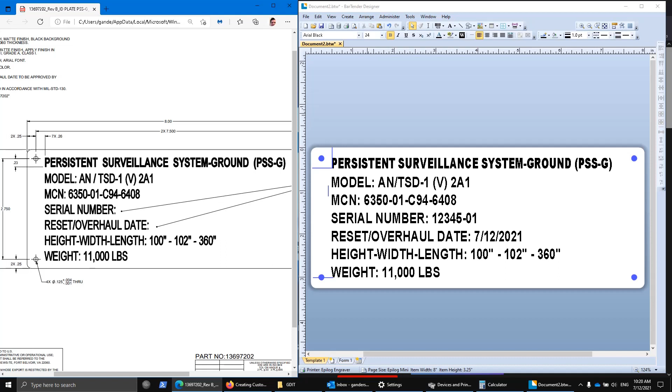In this video, we're going to go through the design process of a laser etched nameplate. This is a black anodized nameplate that is on the left here in this drawing, 8 inches wide by 3¼ tall, and it's just text, maybe with some fields. We'll pause throughout this video to change topics slightly, but try to keep it all within one close, tight video. We're going to be using Bartender because we're sending it down to a laser, and you could use Word, or any other product that has access to the Epilog print driver, but in this case we're going to use Bartender, and there are some layout considerations here I wanted to show.

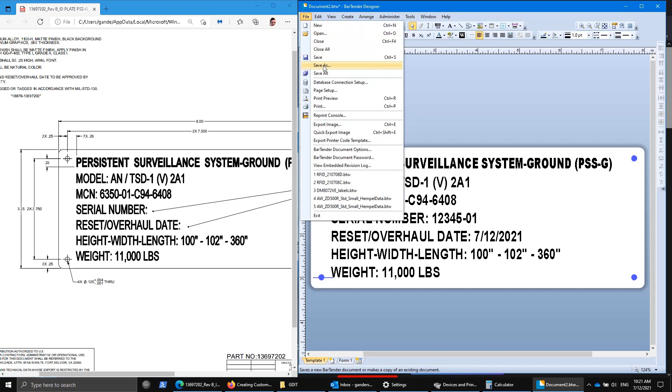I'm going to go ahead and start by just saving this somewhere on my desktop just to make sure I have a starting point here, and we'll start from scratch.

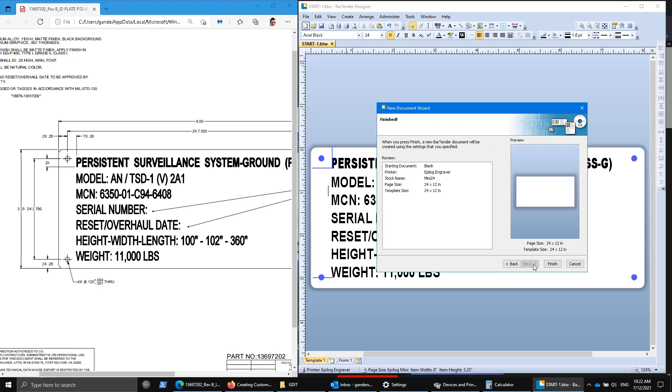So we go into Bartender, and we say New, say Blank, Next. We'll pick our printer, which in this case is an Epilog engraver, hit Next. And if I had a predefined size, I might pick that. There we go, got a predefined size, and I'll show in a separate video how to do that. Otherwise, you can create these things and then save them for future reference.

This is 24 inches wide by 12 inches deep, or however you want to look at it, and this is the flatbed size of the Epilog laser. In this, we are not going to be creating one 24 by 12-inch plate, but rather we could have multiple.

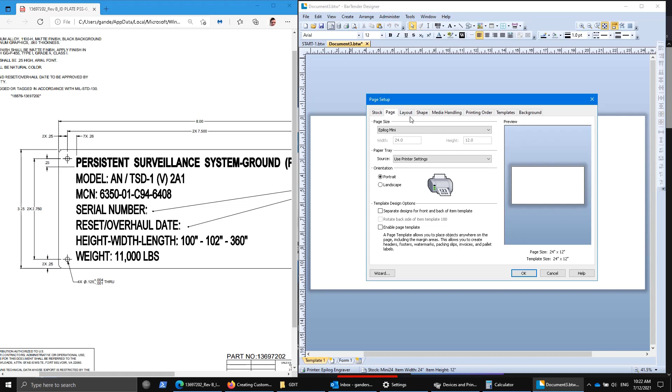So if we go into page setup, remember, for portrait, use portrait all the time for the Epilog Mini. The driver prefers that. And if I wanted to go in here and do multiple plates, I can fit as many as 3 across and 3 up and down within that 12 by 24 flatbed size.

Not going to use any margins. I am going to manually set this, however, to whatever that size was. It's 3¼ over here on the left-hand side, so 3¼ there. And I'm not going to use a gap. I'm going to just make the assumption that I'm going to slam these blanks right next to each other, and that the tolerances are good enough that things will still be centered, right?

And if this was a decal rather than a black anodized plate, you'd hit print borders. I sometimes change this to red, and this will allow the laser's driver to shift into vector cutting mode after it's etched the text. This is again for decals only, where you want to go in and do a vector cut on the outside to cut out the decal. This is a black anodized nameplate, so we're just going to leave that off.

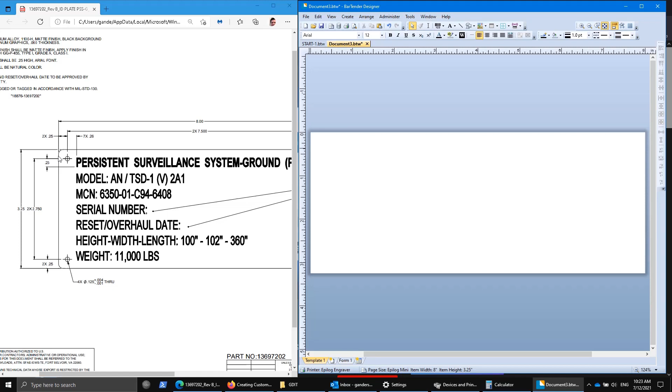Okay, this is pretty much done at this point. Now you can see it's 8 inches across, 3¼ inches tall, and gosh, this has got rounded corners here. Well, let's see. Could I have changed that? Yep, you can. You can say rounded rectangle, and you can even give it a corner radius. And if I look at this guy, it's 1/3, right? So you can do something like that, and now your Bartender screen will look like your blank.

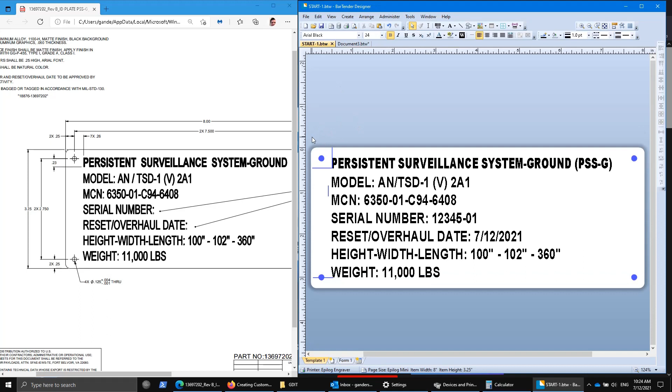Now, some of the next things to do here is maybe do some quick layouts of things that are not going to be printed, but are going to be used as visual guides. So if I go back here, you can see that I put in a number of blue lines. I'm going to just start with the blue circles, and I'm just going to copy those straight over, hit Control C, come over here, Control V, and now I'll show you how I did that.

Double click on anything in Bartender and it'll pull up that entity's size and positioning rules. This is just a circle, and you can go up here to this basic shape, hit circle, and draw a circle. That's what you can do. But inside, you're going to see things like what's the color of the line, what's the color of the fill, and also what's the size. So in this drawing, it is an 1/8 inch diameter hole, so that's what I have, 1/8 inch by 1/8 inch.

I can set the position here to whatever anchor point I want. In this case, I just want it to be the center of the circle, and a quarter, that's kind of what we have here: 1/4 inches over, 1/4 inch down, and symmetric throughout the entire thing.

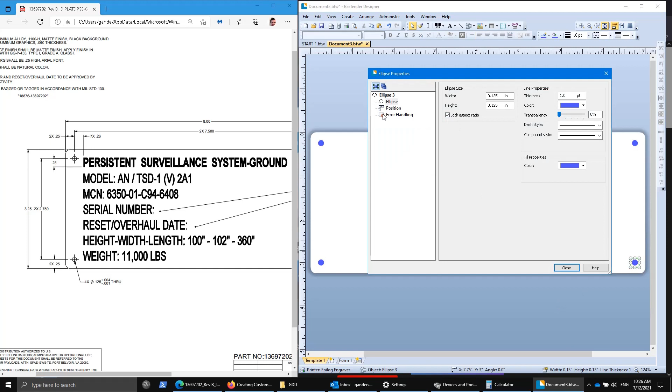You can also lock it so that it can't be moved, and I think that's a good idea for things that are not printed, right? So I'm going to go ahead and select the other three here and lock those as well. When you have multiple lines here, group positions, say lock. Now I've locked them all. If you go into one of them, you'll see it's locked. Okay, all right, so those are holes.

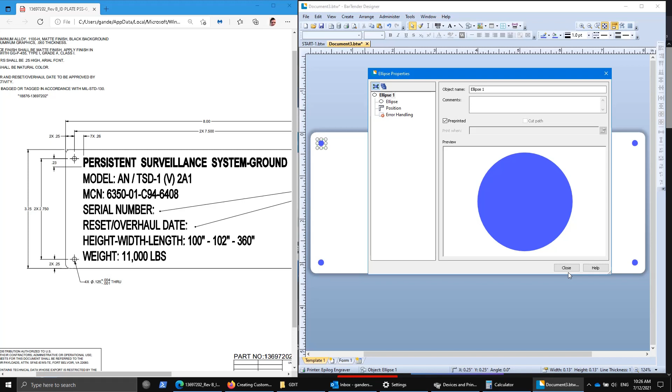They're not printed. How do I know? Well, if you click on one of those objects, it'll say pre-printed. If that wasn't checked, you could pick when you're going to actually print it. But by putting pre-printed, it'll never go down to the laser.

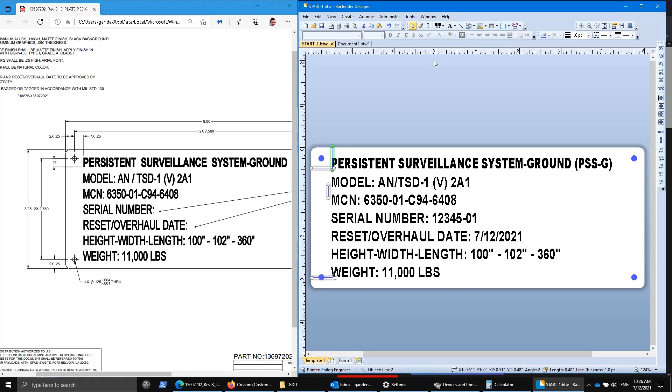Okay, so that's our outline now for our holes. In terms of other things I commonly use for design guides, I throw a bunch of lines in here and color them purple or blue to indicate that, hey, they're not really printing, they're just lines. Well, here, let me get rid of that.

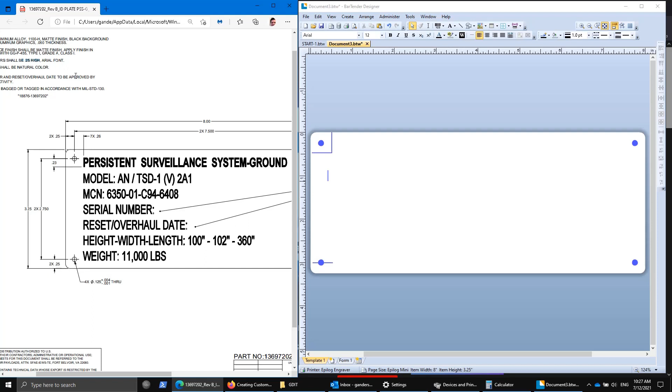When you're looking at these drawings, when they're created in CAD, those guys doing CAD drawings don't really have access to the full real Windows font set. Instead of calling things out as a font size, they'll many times say it's a quarter inch high and Arial font. Well, quarter inch high is a really bad definition, because when you get into sizing fonts, there's white space above and below, and does that include that in the quarter inch? Who knows, right? So it's really common to see drawings that give a poor description of what they want for a font.

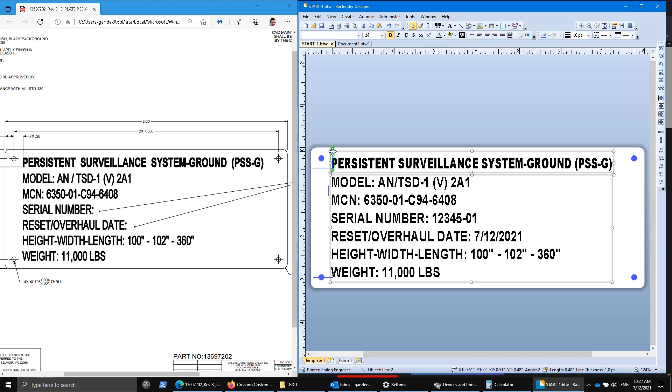In fact, when I laid this out the first time, let's just take all of this. You can draw a big square around everything. I'm going to get rid of some of this, and that as well. You can hold Control and click on more than one thing, say copy over here, hit paste. And if you want to make sure you're centering it within your white space, click over here, click here. But is that really what we wanted to do?

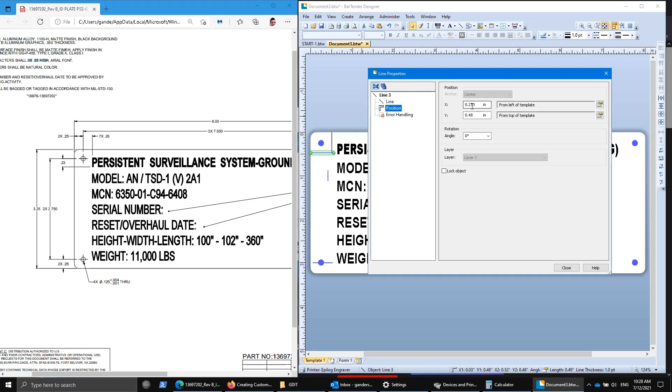Over here, it shows on the drawing that we want this bottom side of this text to be at about 0.48 inches down. So I created a line here, and in terms of its position, I put it 0.48 inches down from the top. Now that should be lined up right on it, and guess what? It's not, when we centered it.

So that's something you can just lay in. There's also a grid snap up here. Get rid of that. You lay that on top, like right there. You can move your arrows around. Now we're going to be per the drawing. So the drawing also wants this to be 0.51 over. So I drew in another line here, 0.51 over, and I can just lay my text on top.

Now it also said quarter inch high, right? So if I put this line in here, you'll see that's about right. So what size was that? Well, that's a 24-point font, but it's including all of the white space above and below. Now, granted, this is all uppercase, but if it wasn't, you'd have things like a comma or a lowercase p or q that fall below the bottom line here. So, again, this is a really bad way of defining fonts in a CAD drawing, but those guys many times just don't have another choice with the CAD systems.

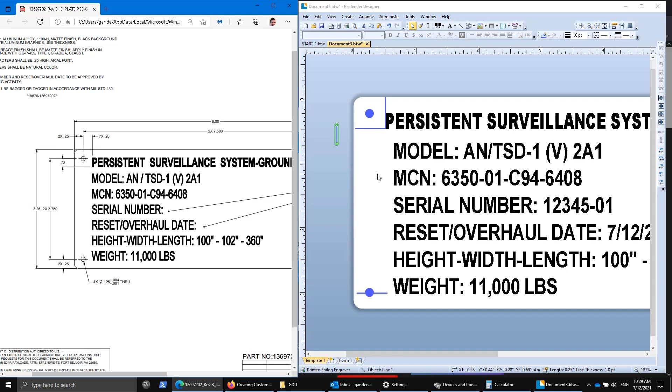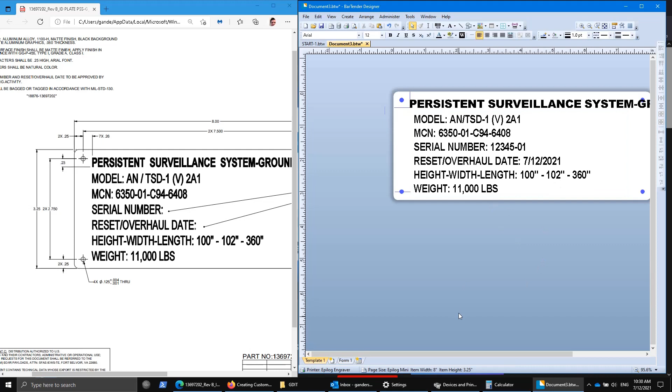Okay, so come in here, that's where I want this to be. And if I double click on it, you'll see I had to also do some other crazy things here. I changed the scale down to 66% width. If I actually left it full width like that, it would fall completely off this page, even though I'm conforming to quarter inch high and Arial font. You can even see that if you look at the drawing, it's a little bit squished together.

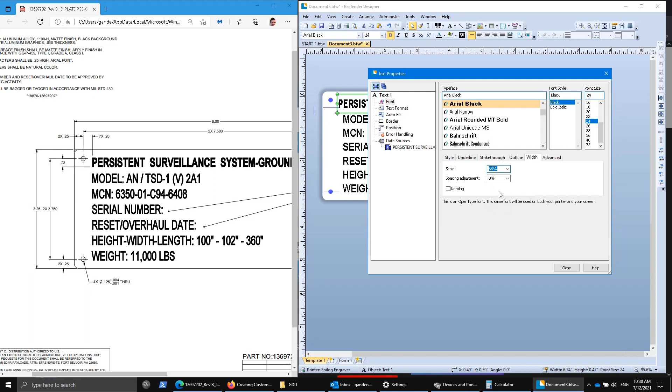So I can go into BarTender, double click, hit font. And on the width, if you don't like what you've got here, you can always type in something you like, but I'm just going to hit 66. And you'll see that comes over pretty close to where we're coming here. I guess I could maybe do 70. Let's try that, if I just typed in 70. Yeah, that goes a little too far, doesn't it? So let's keep it back to where it was, 66.

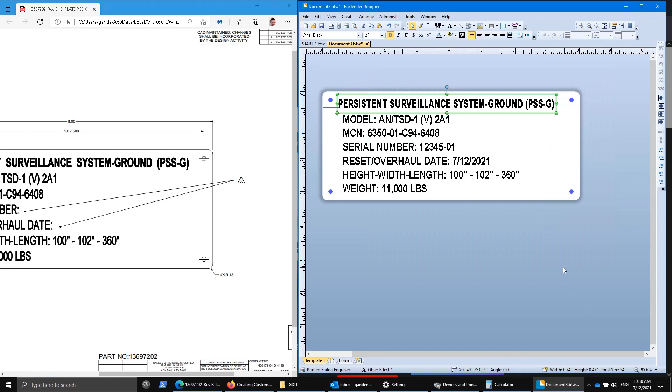Now, the next thing, if I look at the drawing, is I want to have these things lined up. So you can click on one item that is properly positioned and then hold the Control key, click on the second one. Notice that the primary object is in green, and now you can go over here and say, I want to align the left sides. Isn't that nice? And so everything is now consistent in that direction.

Now this is a paragraph, and this is a line. How do I know? Up here, that icon shows it's a line. This icon shows it's a paragraph.

You can change it one way or the other. If I wanted to change this into a line, everything gets scrunched together, so we want it this way.

For laser etching, I always put bold on everything. Even in this drawing, they're showing a different weight to the bolding, but I think you really want bold on both. So I've taken a little bit of liberty here. This is an Arial font, whereas this one is Arial Black font, and that way I'm able to get a little bit heavier mark on the description here.

If you double click on this, it's just a single line that says that. Any piece of information you're putting on your BarTender screen, you can give it a variable and reference that throughout the drawing. So I'll put description, or maybe I'll just put name. Okay, so now this has a variable of name behind it.

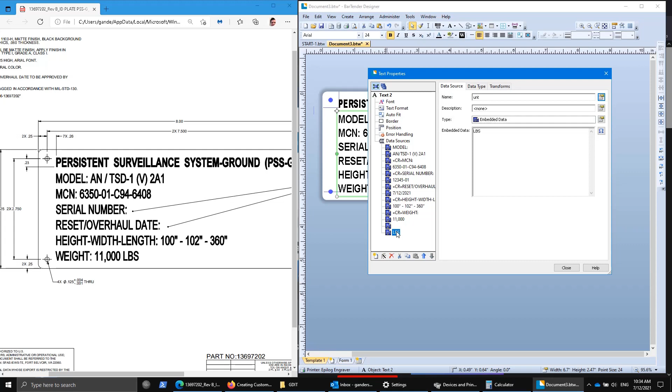Okay, so there we are. At this point, we could actually just go ahead and print this as is. If you don't like the blue items there, you can select everything, get rid of that by hitting Control and clicking, and then drag these off into the blue space. Anything that's in the blue space will be ignored by the printer driver, leaving you only with this.

You certainly can delete them, but if you're still playing around and moving stuff, it's good to have some aids on the left-hand side to pull back in. All right, so we're going to pause on this before we go to the next topic.

All right, we're going to continue now with the next section. The next section here I wanted to go through was user entry forms. So here, down in the BarTender bottom screen, you have two tabs: a template and a form. You can actually have multiple templates and multiple forms within any one BarTender file, but we'll keep it simple here and just have one of each.

This is what you're printing, right? This is your template. Now, how do you get information into it? You don't really want end users going ahead and double clicking and editing things here. That's a bit messy, and they might move things, they might change things. So instead, keeping them out of the design, we can create a form that they're prompted with every time they go to print or send this down to the laser.

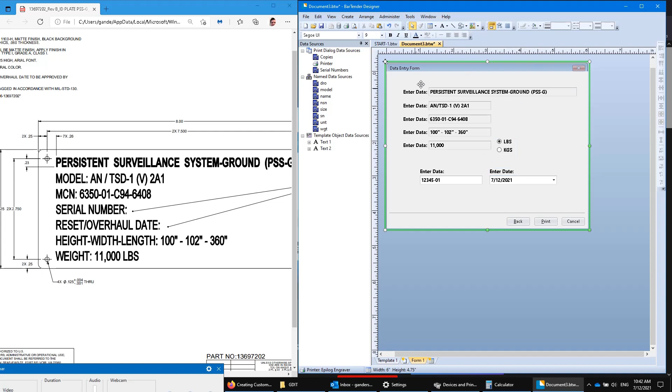So now we have things in gray and things that are not in gray. You can even click on things here and change the background color—let's see, where do we do that? Font, here we go, background color. Change it to something that makes it obvious they need to do something with this.

So let's take this one. The other thing we're going to change here is the text label. This one's going to be serial number. And the next one is this—this is repair or reset slash overhaul date.

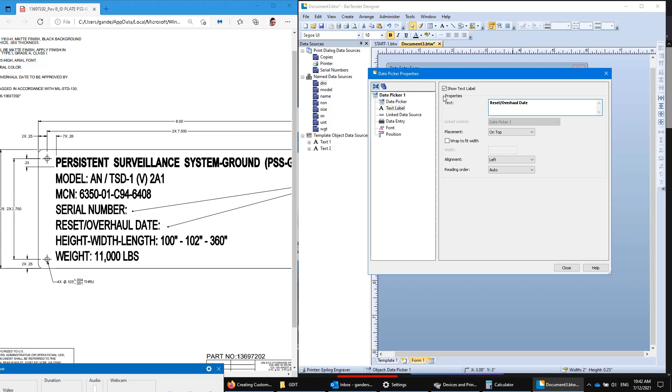Okay, and I'm going to pause and probably fix these as well, but that's kind of how you go about changing the descriptions and entering this information in.

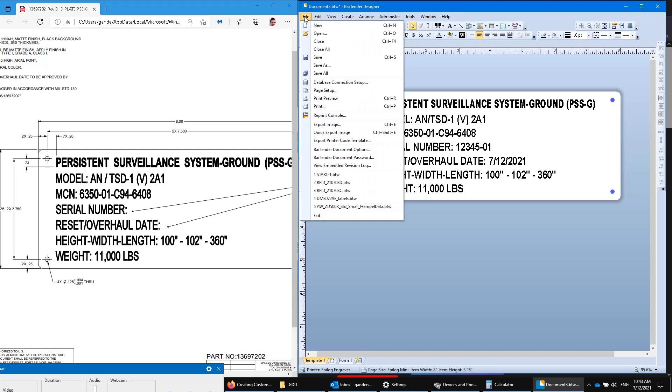Then let's just do a quick preview on this. So I'll go back to template. We're going to first save this, and I think I put this up here—I'll do start 2 here. And let's do a print preview. I'll say I'm going to do 1 print. These are all—I don't have anything set for defaults there, so they come up that way.

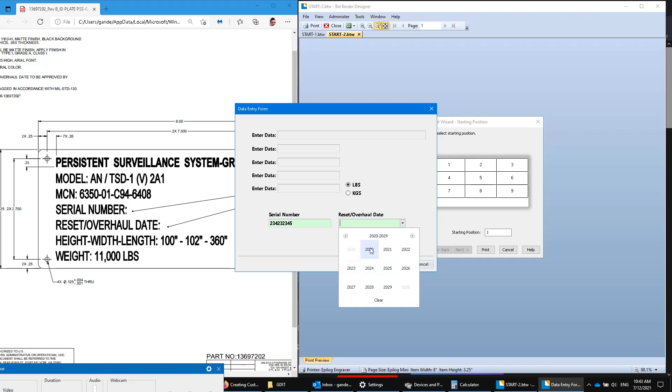If I put in a serial number of something like that, and I do this flyout, I could go back in time, right? You can just click again, say, oh, I originally made this in 2020 on June 18th, and hit preview. It didn't have default values for that—that's why those aren't there. But you can see there's my serial number, there's my overhaul date.

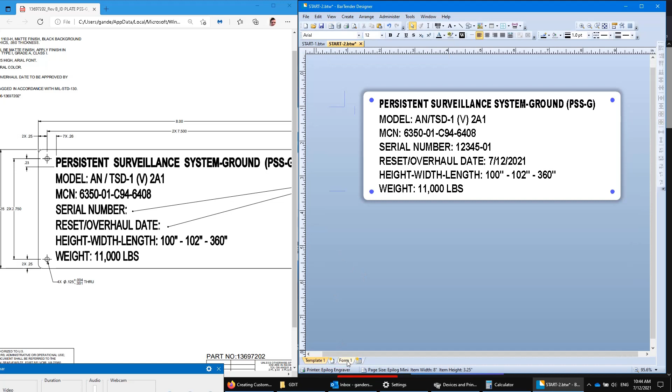And one last thing we can do here in the design that's quite useful is in the form—you can make this a little bit bigger. I'm going to slide this over just a little bit, let's make the form a little bit bigger, and let's move a couple things here to make a little more space.

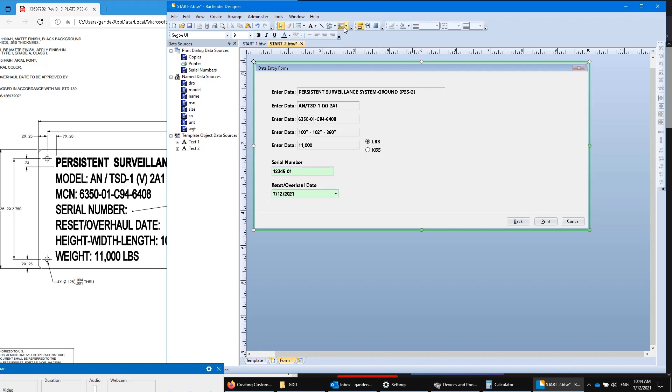And I can put in a preview. So preview of template, and I'll just draw a little box here. And template 1—there it is. So now when I make changes, you'll see that there.

Let's just save again, hit print and preview just to show you what that looks like again. As soon as I put in a serial number, it'll show up there. As soon as I put in a date, it'll show up there, right? So that's how nice this can be in terms of a form—it shows people what it's going to look like before they send it down to the laser.

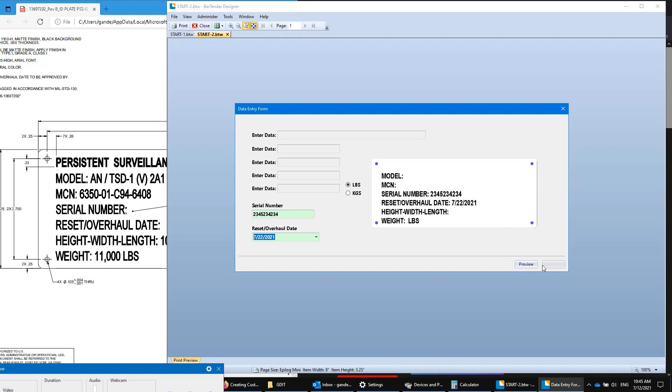Okay, all right, so I'm going to pause again. I'll fix those entities and descriptions here, and then we'll come back for one final print.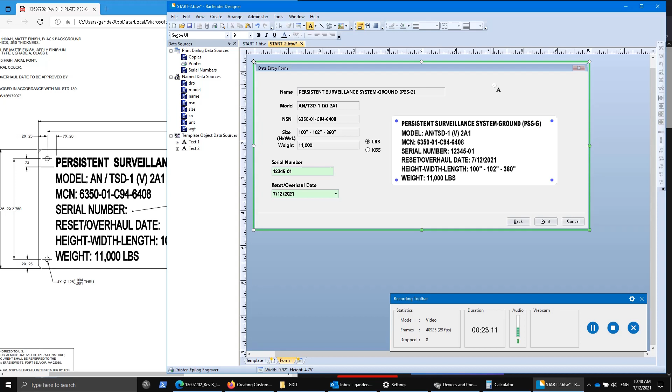Okay, we're finally done. I've renamed things. You can double click and hit that and put in whatever you want. You can also center that so it goes on the top, or left align it so it goes there. It doesn't really matter what you do, where you want to put that stuff, but you have a lot of freedom. You can also create a piece of text up here and call it a title.

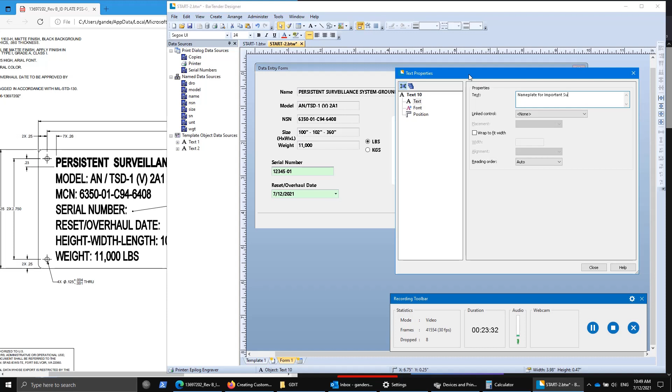So if you want to give it a color, and just say whatever it is, nameplate for important stuff, whatever, right? You can give instructions at the top, whatever you want to do. You don't have to, obviously, but you can. You can make this whatever you want, size it a little bigger or longer or whatever works for you.

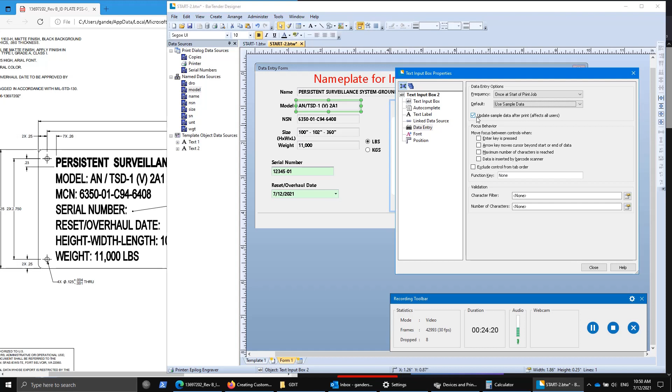And I've also set these - the one other thing I wanted to show here is when you click on any one of these, there is this data entry button, and its default is to use a specified value of nothing, of keeping it blank. You can keep it blank or keep a default value until it's changed. But I typically will just say use sample data, and then if somebody does come in and edit the default value for this, it'll show up here as well.

So here, these are actually set to be blank, and there can be an advantage of that from a user data quality perspective. If you want it to be more obvious to an end user what fields they need to fill out, you can leave them empty. The other thing you could do is just say, look, I want it to be the sample data, but I want it to be whatever the last sample data was.

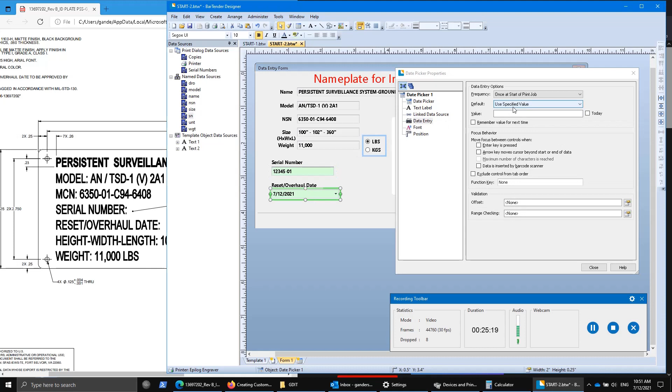So if you've got a really long serial number and it's only the last two digits that are changing, you might want to have this update to the default value or the latest default value for a serial number. And the same thing for this overhaul date - you just say use the latest one, or you could say use today's date. That's another option. So it's your choice. You have to figure out what works best in your own process, and then move forward.

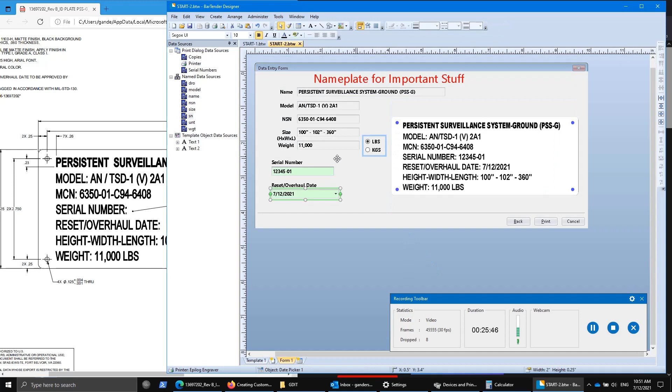Lastly, let's just go ahead and do a save again. We'll hit print, I'll do a preview. Um, I should actually do one last thing here. This could be valuable, especially on serialized plates. So if you go into the serial number - you don't have to do this, but...

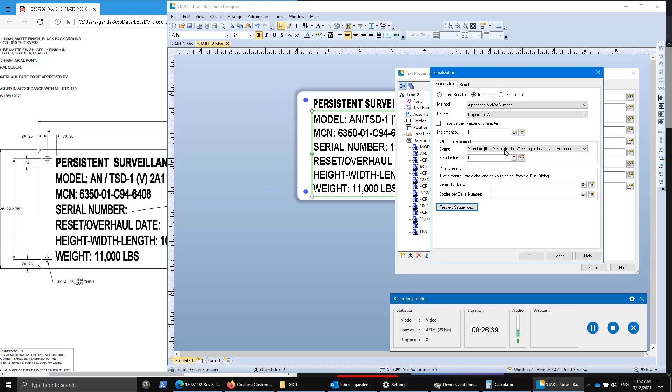Okay, so let's just do that. You can actually preserve the number of characters so it doesn't change. And we'll say OK.

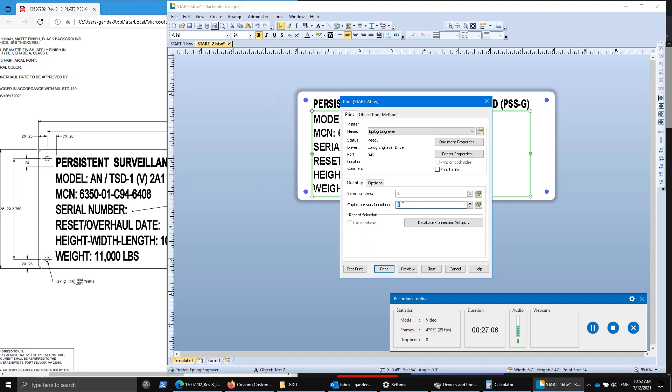Now, when we go to print, let's say you wanted to do 3 plates in the laser bay. Well, up here you could now say 3 - you can just type 3 if you want. Okay, 1 copy per serial number, right? If you wanted 3 copies of the exact same plate, you would put it here and leave that to be 1. But in putting this at 3, you will now see - I'm going to pick a starting position.

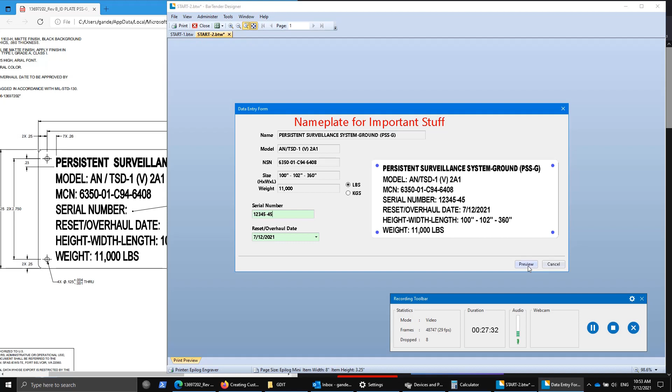Let's say this one was crap and we made a mistake, and we're going to leave it in there, and we're going to start with this one. Okay, so the laser is going to start at number 2, and when I hit print, I can change some things here if I want. I'll change this to 45, right? And hit preview, and that's where it's going to laze, here, here, and here. Notice that the serial number has changed - 45, 46, 47.

If that's what you want to do, you can use BarTender to serialize for you. If it isn't sequential, it might just be as easy to go ahead and do the labels manually. But again, if you need to do more than one etch job at the same time, you can use BarTender to do some rather sophisticated serialization on this, right?